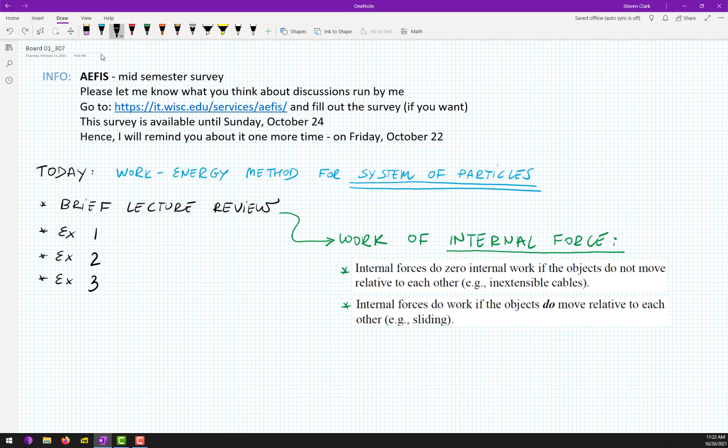Example number 1. So it looks like Taylor Swift was right. Haters gonna hate. Okay. As usual, please familiarize yourself with the problem statement before we start our solution.

All right. So what do we have in here? We have 2 bodies, a little body and big body. Little body has mass lowercase m. Big body has mass uppercase M. And little body will start sliding on the big body. We have no friction between big body and the ground. This surface has no friction. And we have friction between these 2 surfaces.

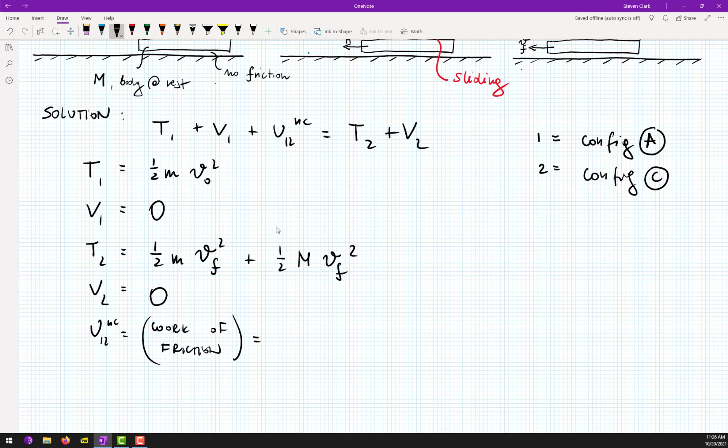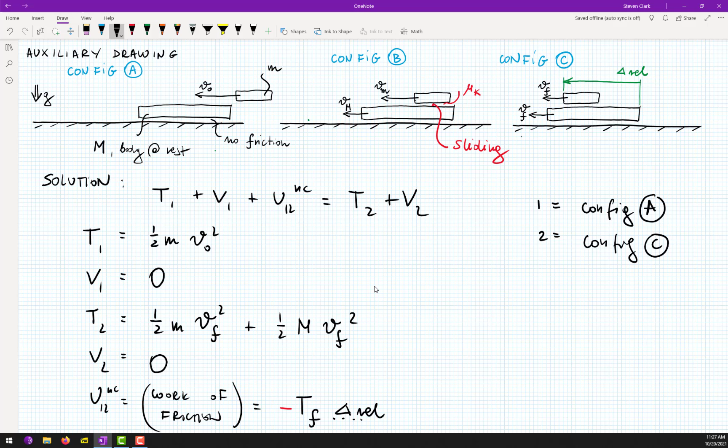So that would be TF with negative sign times distance. And what distance should I put here? Delta rel, the relative sliding distance between two bodies. And let's very quickly find TF. You guys probably know that TF will be equal to mu k mg. Let's do it quickly: FBD for just little mass.

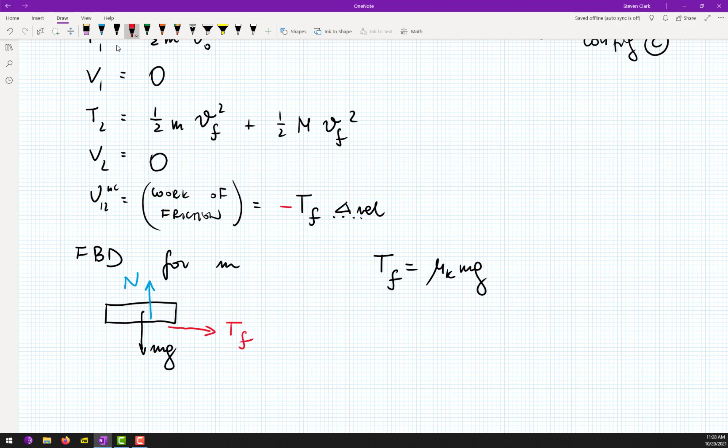So we have mg, we have n between two bodies, and we have TF in here. By the way, n is also a non-conservative force, yes? But you guys know that work of n will be 0, because this is our trajectory. So you can see clearly that n is perpendicular to our ds.

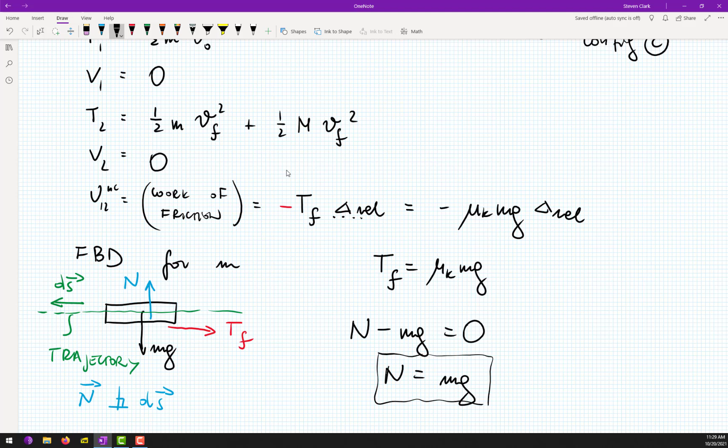And since this is our trajectory, you can clearly see that n minus mg will be 0. So n is equal to mg. All right, so this is equal to minus mu k mg delta rel. Great, so we solved 100% of the problem, yes? 100% done. So let's plug in these 5 guys back into our original equation, because that was our next step.

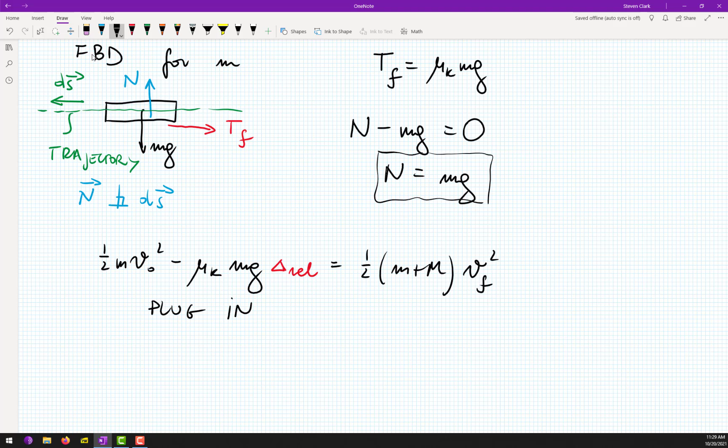So we should write 1/2 m v0 squared minus mu k mg delta rel is equal to 1/2 (m plus m) v final squared. And this is one equation, one unknown. So you can find that, just plug in values, grab your calculators, and obtain that our delta rel is approximately 6.95155 feet. This is the answer.

Questions to what happened so far? By the way, this time we have homework 6, yeah? Like this week is homework 6 or 5, I don't remember. This is actually example number 1 on that homework. So you have extra points on homework, okay? But the 5 other problems do without solution manuals, okay? Any questions?

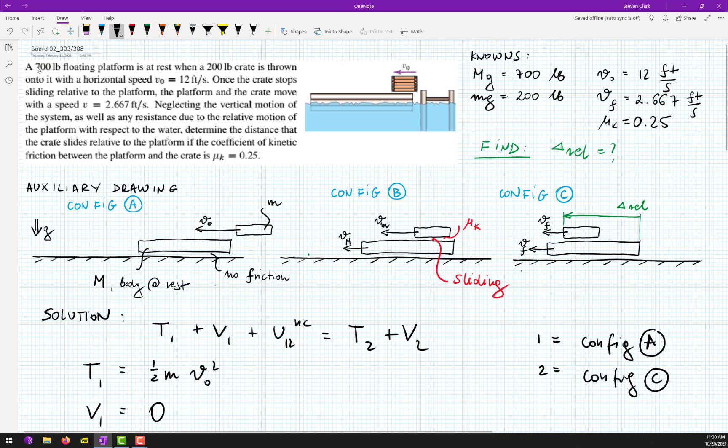So maybe this problem. Please familiarize yourself with the problem statement before we start our solution. All right, so what do we have in here? Again, we have two bodies. Ian, do you remember? 2 weeks ago, you asked me whether we should consider the two bodies separately, or consider the system as a whole. For kinetics, the previous chapter, each body separately; free body diagram you should draw for each body separately. Work energy method allows us to consider the system as a whole. So this is the answer to your question from 2 weeks ago.

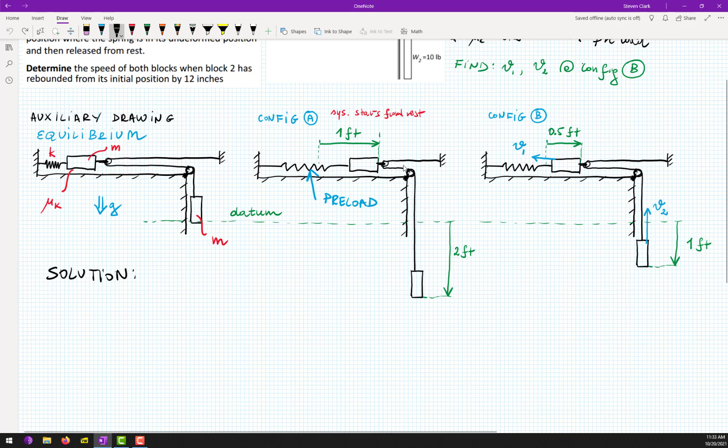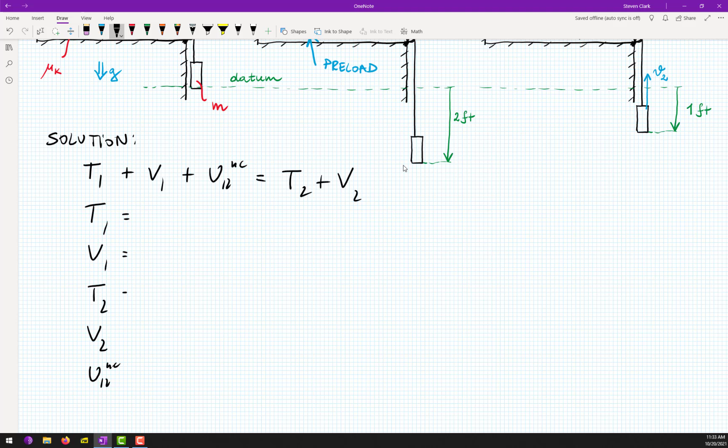And we are asked what will be the velocities of two bodies once this guy rebounces back, when that guy goes up by 1 feet. And the system is released from rest, of course. Questions? Okay, so let's continue our routine. T1 plus V1 plus U12 non-conservative is equal to T2 plus V2. System starts from rest, so I solved 20% of the problem.

And by the way, subscript 1 corresponds to config A, which is this configuration, and subscript 2 corresponds to config B, which is this configuration. So at config B, two bodies have velocities. So I can write in here 1/2 m v1 squared plus 1/2 m v2 squared. So we have two unknowns in here, v1 and v2.

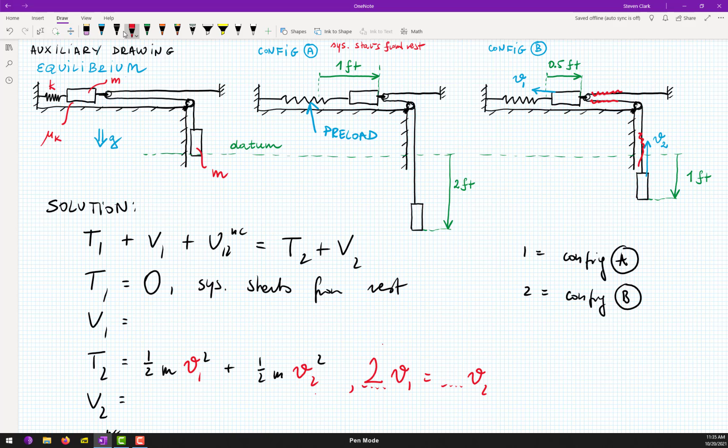But there is a relationship between them. Maybe some of you can tell me where should I put number 2? v1 is equal to v2, so I should put number 2 in here or in here. Why number 2? Because we have one rope attached in here and two ropes attached in here. v1 equals 2v2. Take one more guess. Great, yes, that's good, because even look at the lengths of these vectors: v2 is larger than v1. Even this is a hint.

And I usually figure that out following this approach. I know that if I pull this guy down by 2 feet, this guy will just go to the right by 1 feet, because it has two strings attached to it. But I think the person who was wrong, maybe I just forgot to define which body is 1 and which body is 2. Probably that was the cause of the mistake. So this is body 2. This is body 1.

Now potential energy. Do we have springs in the system? Yes. Do our bodies change elevations? They do. So let's write in here V1 gravity plus V1 spring. Our datum is here. So V1 gravity will be mg times minus 2, because only body 2 changes elevation and it is 2 feet below our datum. And the spring is stretched by 1 feet, so I can write 1/2 k 1 squared. And for V2, the same division: V2 due to gravity plus V2 due to spring.

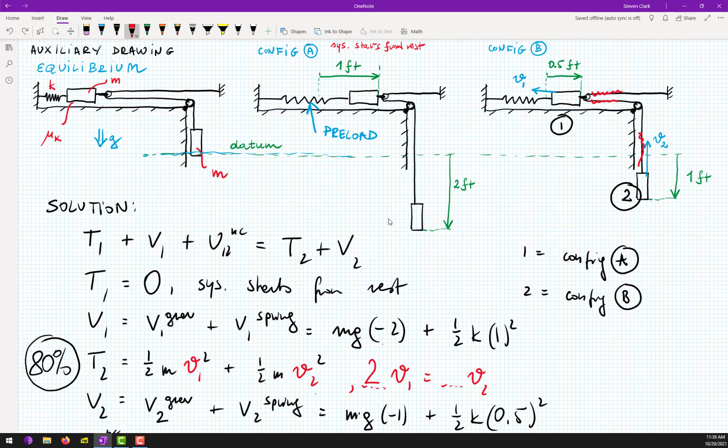Okay? However, I'm gonna go back to what was there before. So I'm just gonna operate in these values. But if you put datum there, the answer will be exactly the same. Okay. Any other questions? All right. So let's do 100% of that problem. Do we have friction? We have friction in the system, yes. So we have to put it in here.

Work of friction. Okay, but let's put it in even more mathematical form. So it'll be TF, work of TF. So I will just draw FBD for body 1, okay? So what forces act on our body? We have mg, we have N, which is also a non-conservative force. We have TF, no, sorry, not this way. TF acts this way, good. And we also have kx.

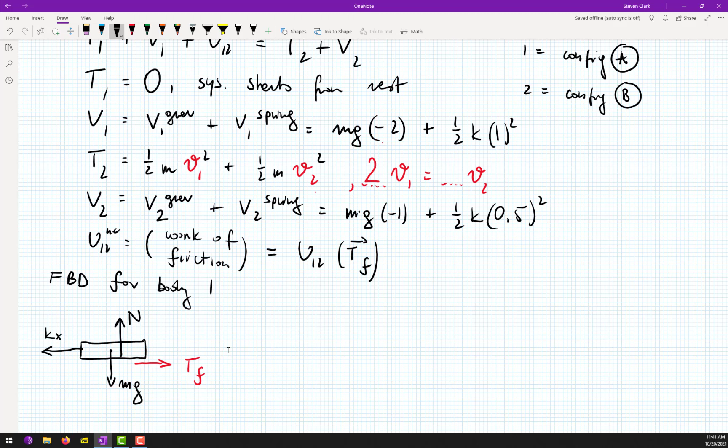But only 2 of them are non-conservative: only TF and N. So, sorry guys, I will just erase this very quickly. I hope you won't hate me. And I will put work of N for the final time this semester, okay? By the way, in this semester, work of reaction forces is always 0. Actually not, because there can be like rust or something. So 99% of the time, work of reaction forces is 0 because they are so-called smooth constraints. Doesn't matter what it is.

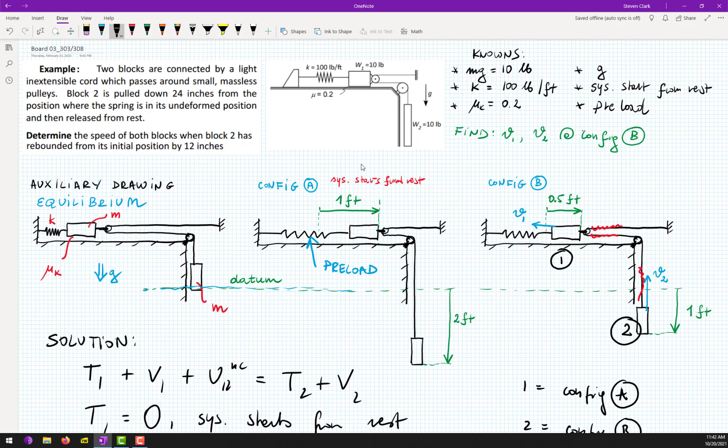Yeah, Trevor. Is there a tension on that one? Oh, there is a tension. You're right, I made a mistake. Thank you. 2T. But we know that work of internal forces is 0. Remember lecture? So we will also neglect 2T. Anyway, you have U12 of TF plus U12 of N. It's only red forces, non-conservative forces.

So in here this guy will be minus TF times this distance, times half a foot. And this guy will be the integral from A to B, for the last time this semester, of N times ds, and you guys know that this is 0, because N is perpendicular to ds. Because this is our trajectory, and this is our ds.

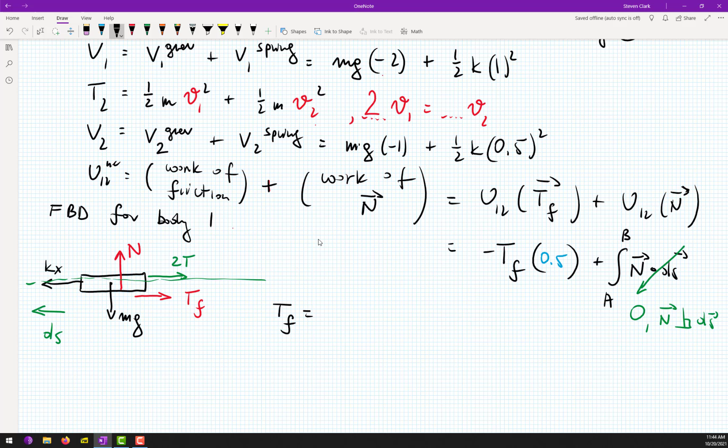Great, and TF is equal to mu k N, where N is equal to mg. So we can clearly see that our U12 non-conservative is equal to minus mu k mg 0.5. Okay. Any questions? So it seems we have 100% of the problem done. The last step is just plugging everything back into our original equation. However, these expressions are long, so we can grab our calculator and figure out their values.

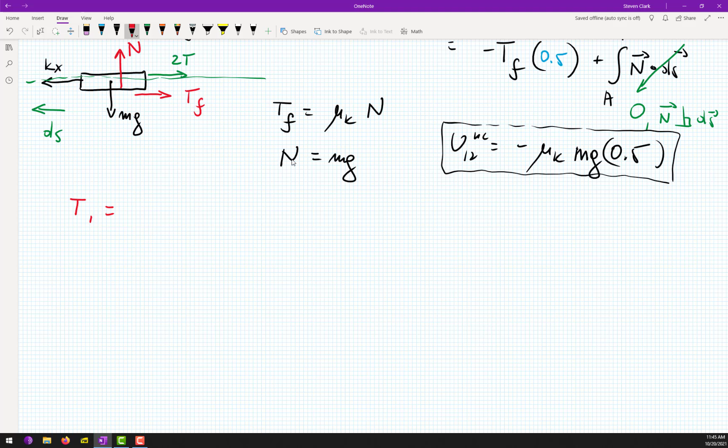So the value of T1 is the simplest because it's 0. Value of V1, if you plug in values here, is exactly 30 joules. Value of T2 has to be 5 divided by 2 m v1 squared. Value of V2 is equal to 2.5 joules. And U12 non-conservative, if you plug in values, will be minus 1 joule. Now we can plug everything back into our original equation.

And we will end up with 0 plus 30 minus 1 is equal to 5 divided by 2 m v1 squared plus 2.5. One equation and one unknown, and that unknown is v1. So let's find v1. v1 is approximately 5.842 feet per second. And they also asked us to find v2. v2 is equal to 2v1, approximately 11.685 feet per second. This is the answer. Okay, questions?

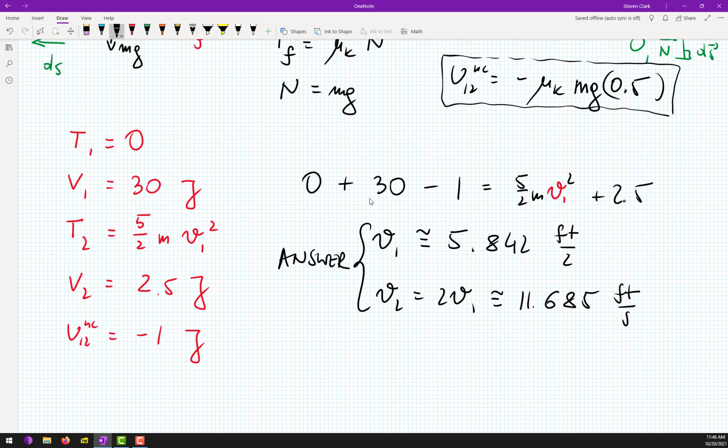No. Okay, so just closing remarks. Do you see that there is like a recipe to solve this type of problem? So just get familiar with that recipe, do homework following that recipe, and you're ready for the exam when it comes to this.